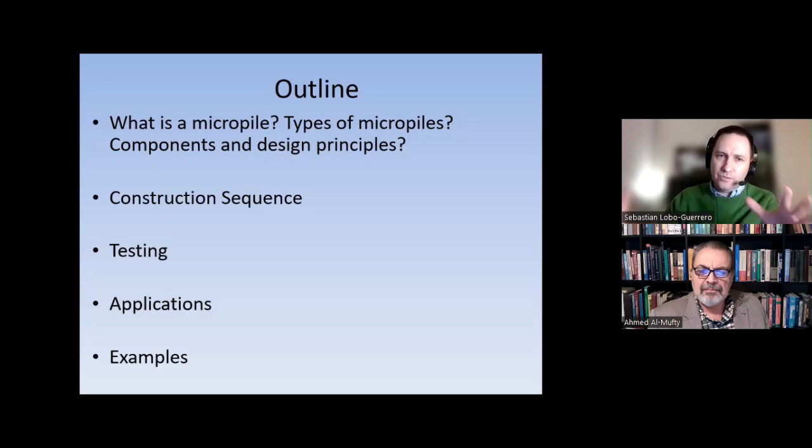Like to make vertical, or you can't make a micropile vertical. Correct, no. So initially he was doing them incline, because what he wanted to do was a reinforced mass. What he wanted to do was not individual elements. He wanted just to go and start drilling in all kinds of directions, injecting grout, and making like a rigid body out of that.

That's what I'm saying. Today that definition is more like if you're doing ground improvement rather than micropiles, because for us, micropiles now are foundation elements. Each individual is an element. So that was his initial definition, and he started using a smaller diameter compared to what at that time was being used for like a small pile, like a small shaft. That's where everything started as a micropile.

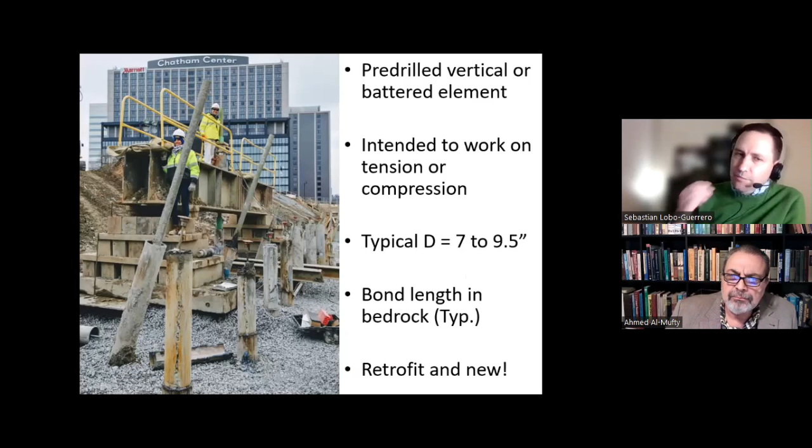Is this where the doctor... this one? This picture was in Pittsburgh. It was a bridge in Pittsburgh in the middle of downtown. Okay, yes, okay, thank you.

Yes, no problem. So moving into the design manual - this is basically what we have today. Really the main comprehensive manual is the Micropile Design and Construction manual, put together by FHWA. There are multiple editions of that, but it really started around the end of the 90s, and it became kind of like the main reference.

Then after that, AASHTO ended up incorporating micropiles. Typically the way it works is that FHWA, in the US, is the entity doing the research - they put together the conclusions and the document, but AASHTO is really what becomes a code, and it becomes law. If you're in transportation, you have to follow this. So AASHTO incorporated micropiles in section 10, which is foundations, and the equations we're going to talk about today are all on AASHTO.

Different states take AASHTO, different DOTs, and modify things depending on their state. For example, I have the design manual part 4 from the Pennsylvania Department of Transportation, which is the one we use in Pennsylvania. What they did is take AASHTO but modify it - for example, the part on rock, saying you can only have micropiles founded on rock and things like that. I have the honor of being co-author of the bridge design manual for the state of Delaware. In 2015 we put together this manual, and we also allowed micropiles and put in some special coastal considerations.

Which year, doctor? The original was 2015 for the one in Delaware. But since then, I know in 2016 we had a new version, and I think since then there's been one more update.

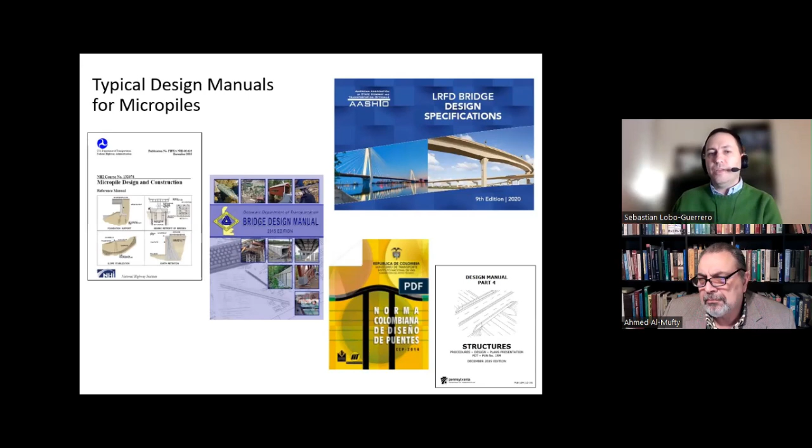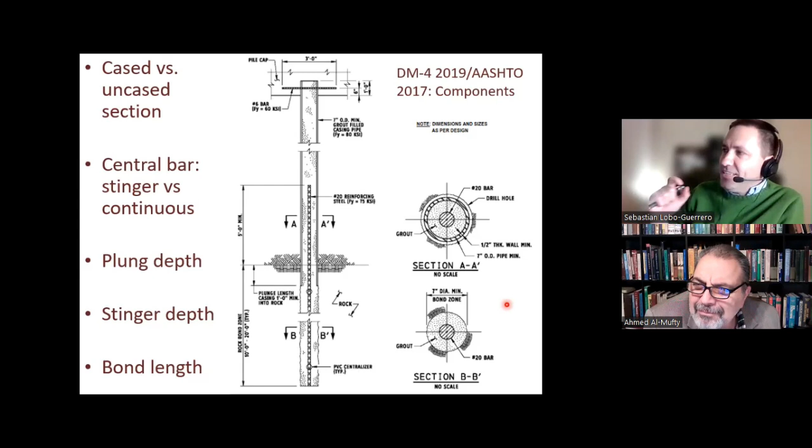Yes, bars. So it all goes into, because remember, there's a lot going into a name that is micropile. This started trying to, and this is interesting to see, the evolution of the technology, because when we started it was micro, small loads, small things. But then what is the cost? Look at it this way.

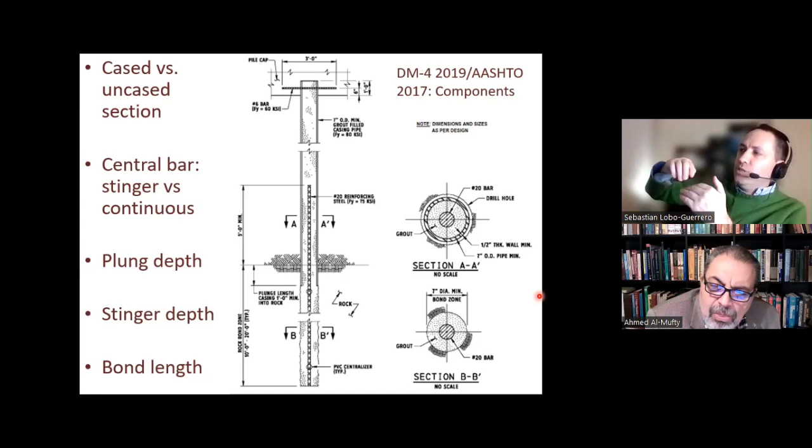When I'm drilling, imagine that I have 60 feet of soil and then I go to rock. If I'm drilling through 60 feet of soil and then 10 feet into rock, what I really want to do, instead of doing a lot of elements, is do fewer elements with more into rock and more capacity. The more capacity I can have in one element, the better, because then my cost is less. It costs me less to do deeper holes, but a significantly smaller number of holes, than to do a lot of holes that don't go deep. So because of those economics, you want to maximize the capacity of your micropile.

So when you are talking about these diameters, literally what we try to do is put a bigger bar that allows me a higher structural capacity. The higher structural capacity I can get, the longer my bond length without exceeding the 20 feet, and I'm optimizing the foundation.

So it is really more for economics and trying to make this cost effective than anything else. There is nothing wrong to put a smaller bar. It's just that if you put a smaller bar, your resistance is going to be less, your bond length is going to be less, and you're just going to need a higher number of elements. So that's really all the reasons. There is absolutely no problem doing something smaller. You can even reduce the size of the micropile itself, even if you reduce the bar. But it's just the economics, how they end up working out.

Now, the capacity, that's what I said, it has evolved. We used to do micropiles of 50 tons. Now we do micropiles of 250, the numbers have increased significantly.

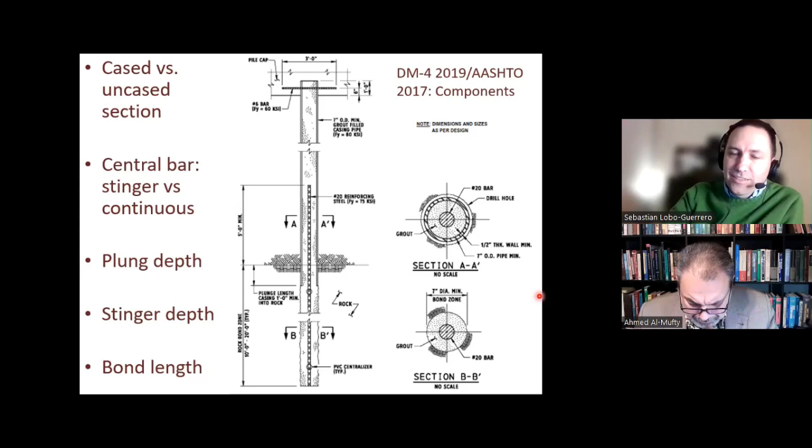So, is it in any way related to buckling of bars? That's another thing, and this just comes straight from FHWA. FHWA considers that if you have a micropile that is supported on soil, on the surroundings, like if I'm drilling through soil or if I'm drilling through bedrock, it doesn't really have any problem with buckling, as long as you stay with the typical diameters. We actually have to analyze it once, because when you pass through karst topography, or when you are passing through abandoned mines, and your micropile is going to have a length that is not supported by anything around it, then buckling is a consideration, because this is a very slender element. So in FHWA it's explained in detail.

We end up doing that calc for the typical micropile, about a 7-inch micropile with a number 20 bar. We found that you can easily have like 7 feet of unsupported length, and you are still not failing in like the Euler short column kind of buckling thing. So as long as you have support on soil or rock, buckling is not a main consideration.

But the moment that you start passing through voids, then you do have to be aware of buckling, and it's a potential failure mode. It will be very effective when you have a part of the pile above ground. Then that will be dangerous, really. Exactly, you need to check buckling that time. Correct, like you never see micropiles going like that, exactly for what you said, because then buckling -- they're usually underground, always supported by soil on the side.

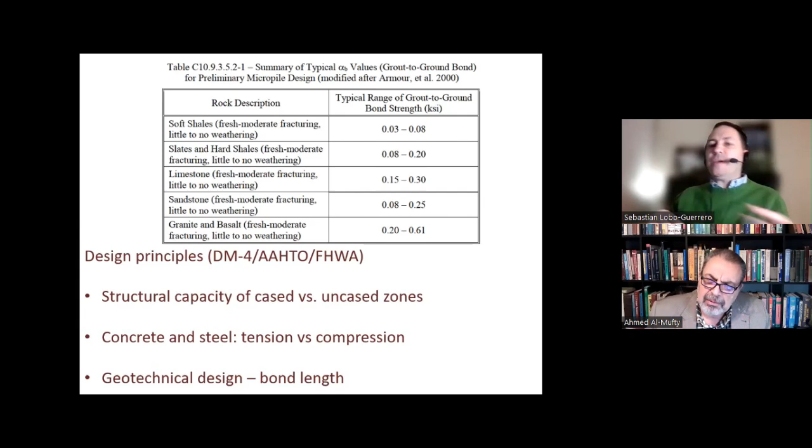Now, so that's in tension. What was that, you multiply 0.8 by what? So typically we used to do it: area times the yield times 0.8, just to reduce it. What is yield? The yield stress. Like, let's say 50 ksi, I mean in this case typically 75 ksi - the yield stress of the steel, basically.

The point that the resistance increases and then becomes plastic - the yield. Yes, correct. But yield - we will not use the ultimate? No, typically on this you use yield, not ultimate, just yield. Yes, that's an interesting concept. I mean, typically AASHTO requires yield and not ultimate.

And you multiply it by 0.8? By 0.8, correct. And then you multiply by a resistance factor? Yes, and that has changed in codes, because the tendency is that most codes are dropping that 0.8 and say, no, just give me the yield, multiply by the area, and that's my ultimate, and then I multiply by a resistance factor. But we used to have that 0.8 for many years. So that is when you are doing it in tension.

Now, when you are doing compression, then it's typically two separate calcs, because in compression you have the resistance on the cased portion and the resistance on the uncased portion. Why two calcs? Because on the cased portion, you do not have the central bar, so you only have the steel of the casing plus the concrete. While in the bond zone, you only have the central bar and grout - you don't have the casing, right?

So in reality it's very simple, because in the majority of cases the bar area is less than the casing area, so you can clearly see - you are required to do both, but you typically by inspection can eliminate one. And then that equation is the usual one: what is the area of the concrete multiplied by F prime C. For the concrete it's basically not the yield, because it's concrete, but basically the maximum stress that the concrete can take. So it's the area times F prime C.

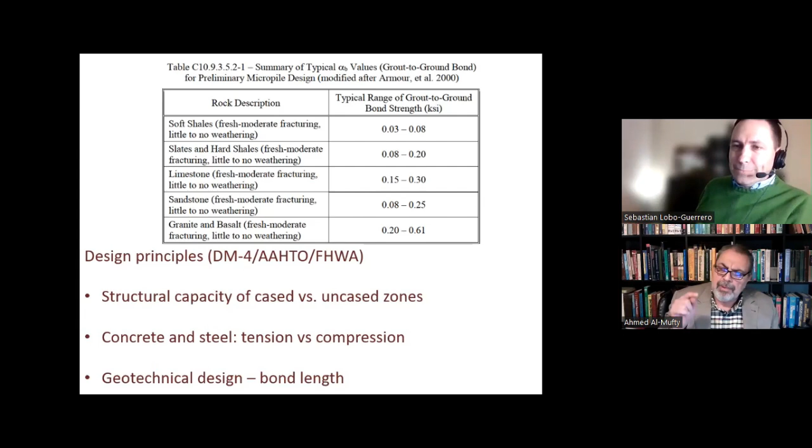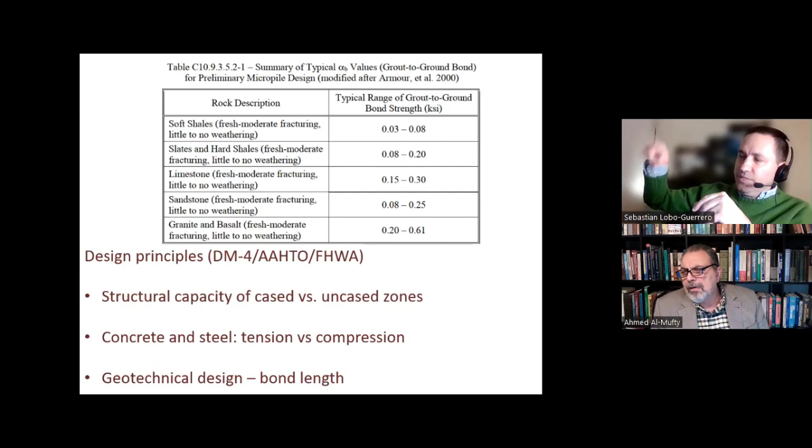Do you check any bearing stresses between concrete and the pipe? No, so that's okay. The general way to calculate is just the area of the concrete times F prime C times 0.85, similar to a column, plus the yield of the steel times the area of steel, and then all of that multiplied by 0.85. We're talking, this one is a structural design - it's the structural capacity of a column section. Correct, it's just the structural capacity of the section, yeah.

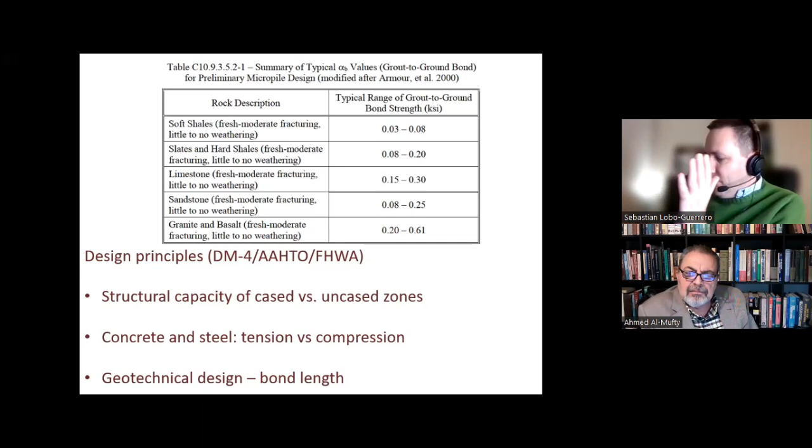But at the top, is the load really transferred to these three parts, or is it mainly transferred to the pipe? So, AASHTO - and I'll be careful on my statements - AASHTO assumes that it goes like that. AASHTO does not assume that there is any failure between casing and concrete. I agree with you, I think the more you instrument this, the load goes where it's more stiff, and probably goes more into the casing than you give credit for. But given the resistance factors and everything that we have, we don't really check the bearing stresses.

No, not really, the pipe and the concrete. Not really, I did it once because same as you, I was like, this doesn't make... I mean, I don't know. I wanted to see it.

AASHTO at the end has the bond between... what I'm saying is, when you check, you end up finding that bond between casing and grout is high enough that it justifies this assumption. I think it's just for your information. I did micropiles in my life, but not as a project, a full project of mine.

What I did usually, I go to micropiles when I have underpinning. Because the machines are small, I can push them inside the building. And I drill a couple of micropiles, replacing a failed pile or strengthening some area. That one I did, but generally, like a project like yours, this one I never did.

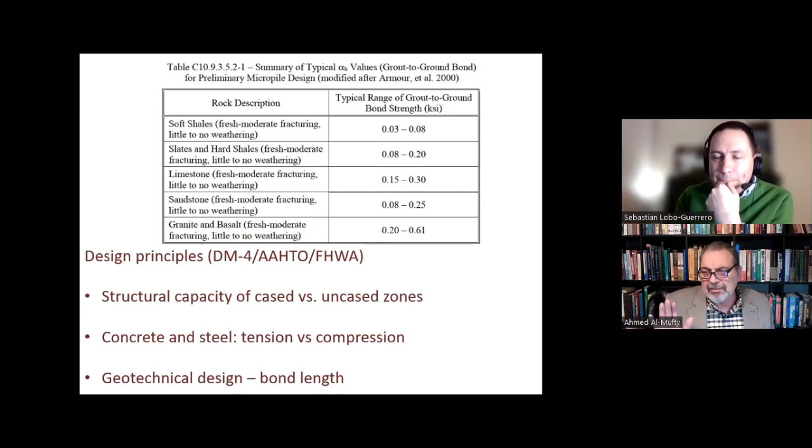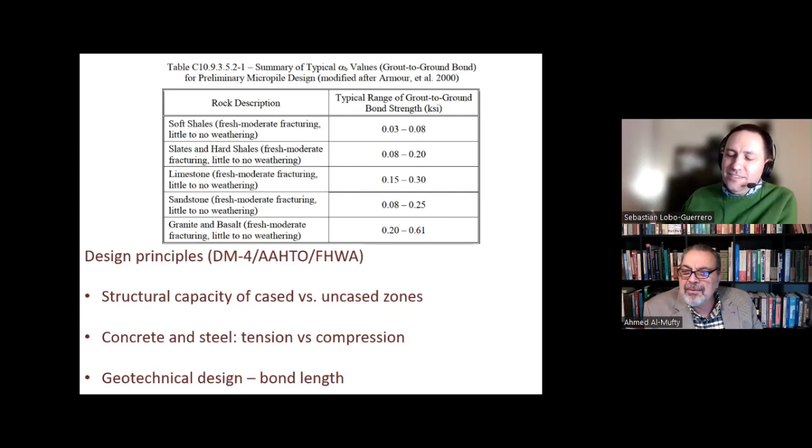So correct, and that's because of what you do and what I do. That's the way it started. This was done for underpinning, right? And then little by little, I used it for underpinning. And then the underpinning took over, right? I mean, they took off, and they became like brand new foundation elements, not only for retrofitting, but also for design. So yeah, this is really the part.

So it's very simple. I do have some thoughts on that, because after doing 20 years of micropiles, I was in some disagreement. And again, I want to be careful in this, because if you design them by code, when you are doing tension testing, the central bar is the one that takes everything, right?

But the more that I think, when you have the micropile going into the pile cap, and you typically put some kind of plate, you have your casing going, your bar, and then you put a plate and a nut, right? So when you pull the pile cap, it's going to develop a shear cone in the concrete, and that's going to come the resistance. To me, it's not that evident and obvious that the load is going to go all into that central bar.

So I start posing the question, how do you know that there is no load that goes into the casing? Now, if it goes into the casing, imagine that you don't have a central bar, imagine that you only have a stinger, and you pull the casing. There is going to be shear between the casing and the grout, and that shear is going to pass the load all the way to the central bar. Then there is the stinger on the bond zone, and there is going to be bond between that bar and grout, and that force is going to go back into the bond zone. It will transfer the load to the bond zone, yeah.

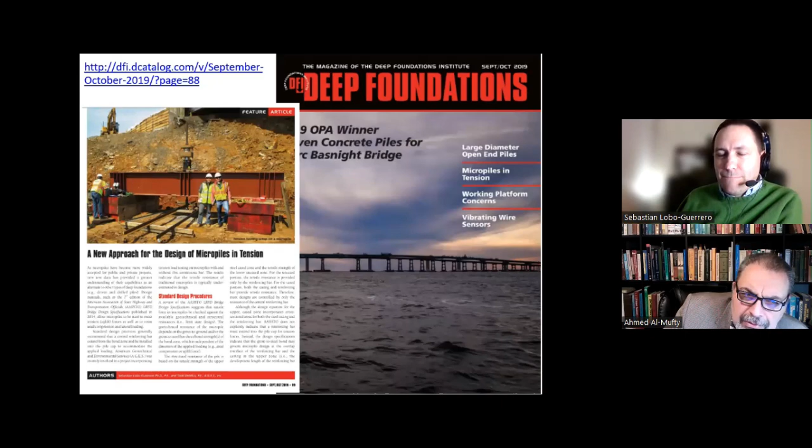Let me ask something about the test. You're using two beams here, with a gap between them to pull out the bar, the central bar. But it's not showing, so let me explain that to the audience. So you have the jack in the middle of two beams, and there's a gap in between?

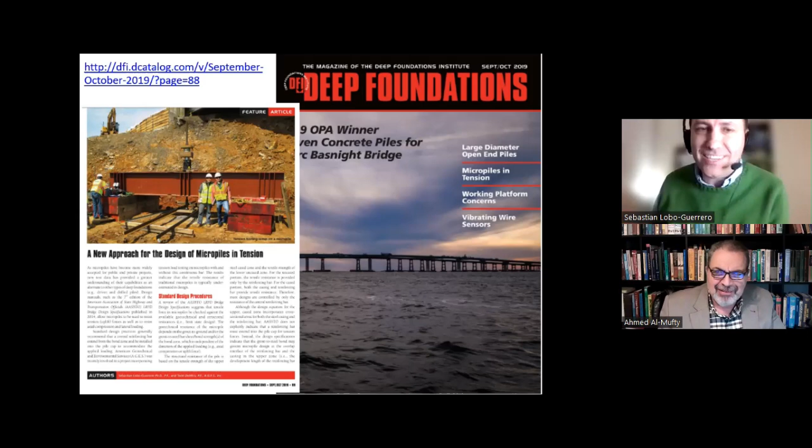Yes. So let's do this, hold the testing part, because I have a whole section of just testing. Let's go through this section, and then I'll go back, because I want to explain the whole setup of the beams and the whole thing.

So most of the rigs that you have now are track rigs. They are typically operated by remote control. There are smaller ones, the original ones were smaller, because they were going into basements, going under bridges. Now that we are drilling bigger and higher loads and all that, they have become bigger.

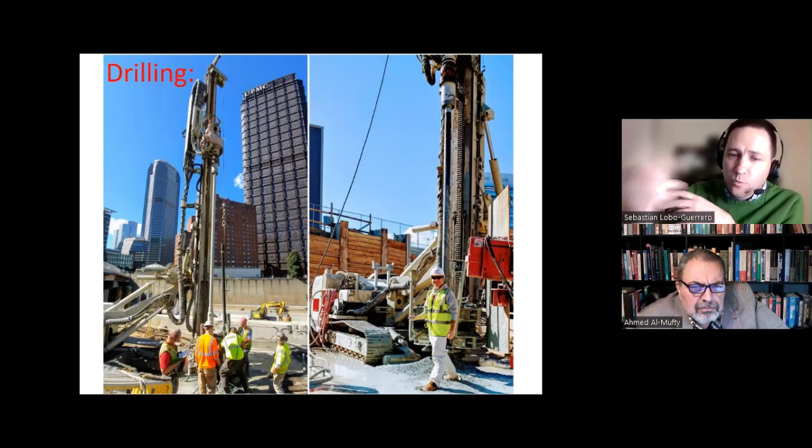So this is for a job, you can see this is the first micropile on the job. We're drilling, this is pneumatic compression air going down, and then you are drilling. Once you have the hole, this is another picture, you can see the pneumatic and all that. Sometimes you use water, sometimes you use air, depending. And you basically drill, you advance the casing.

This is the casing. These are details of the casing. The casing typically has little teeth because if you rotate it, it can also help.

What you see on the red square is this pneumatic jaw, this eccentric tool that, when it goes inside the casing and passes through it, goes to the other side and opens. It's an eccentric tool that opens and gives you a diameter that is bigger than the casing. So now you're making bigger holes that are more efficient.

And then on the left is the central bar. Basically, once everything is installed, that bar is gonna go in the middle. So this is basically the technology: you have the casing, you have the tool that opens and keeps going, and eventually you put the bar.

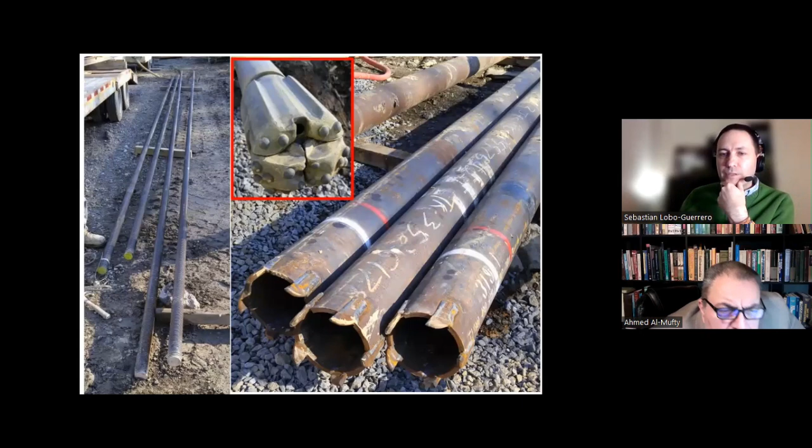Is that bar smooth or threaded? Typically it's threaded - it may be hard to see but it's a threaded one. Yes, typically we use thread bar, and it looks like 60 millimeters, really. Yeah, this one is probably smaller - that's an old picture, and I think at that time we were using smaller micropiles. You're gonna see a few pictures later on that is big, and also we typically...

How long usually are the casing pieces typically? Typically 10 feet, so they can come in 10 feet or 5 feet, depending on what you need. If you don't have a limitation, typically it's 10 feet. If you have limitations like overhead clearance, then you can go 5 feet.

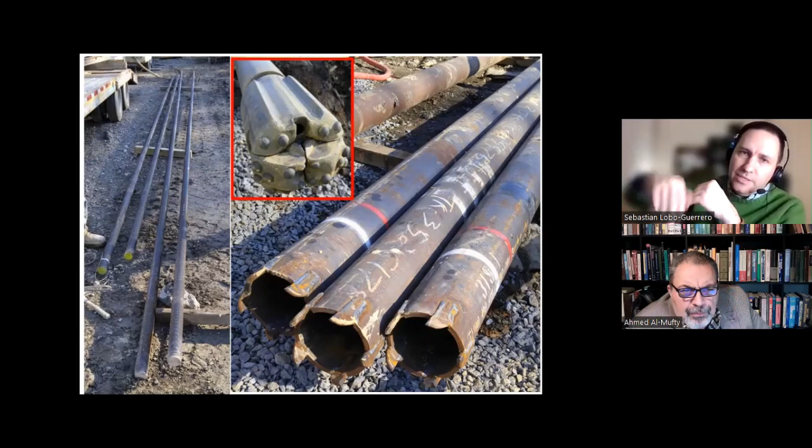So you drill, you put the permanent casing, you go inside. There are two ways to do it. Before we go to some point, we stop the casing and then we drill - but typically, most of the time, you advance the casing and the bit together. You go to your bond zone, and once you confirm that you have your bond zone, then you lift your casing.

Why I say that - because what you want to see is that your bond zone is not in an area that has voids or soil seams or anything like that. If you have a good rock like sandstone, that's fine, you're not going to expect many surprises. But this is done a lot in karst topography, when you have voids and soil seams, it's perfect because you pass through all that junk and go to a good strata.

So the way that you know if you're on good or bad material is basically the torque resistance, the penetration rate as the micropile is being drilled. The operator typically has a good eye on what is the rate of advancement, and if there's a sudden drop, that corresponds to some kind of void or soil seam.

So typically you go, and let's say my bond zone was 10 feet - once I determine that I have 10 feet of competent material, then I stop and lift the casing. That's going to be the final location of the casing. I retrieve the drill bit, I lower the bar - if it's continuous bar, then you lower it, and if it's just a compression, then you just put the stinger down. Once that is done, then you grout it.

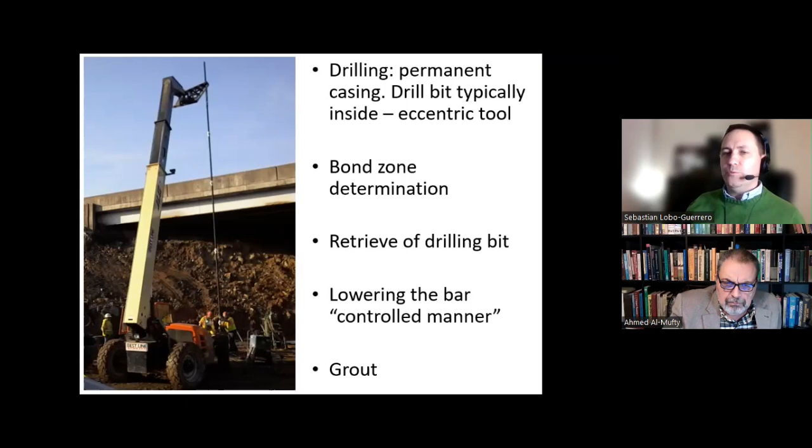Okay, so these are more examples of lowering the bar in a controlled manner. You can see a few things on the bar on the right side. You also have the centralizers, which are those white balloons or balls, whatever you want to call them. The only thing they do is that when you lower the bar, it just keeps it centered.

So when you put the grout and all that, it's just going to keep it centered so you have enough cover of grout around it. That's just the way you want to do it.

So now is the testing part. I'm going to talk a little bit about the testing that we do, and then we go into the apparatus and all that. So there are different kinds of testing, two main ones.

The first one is verification testing. This is similar to other deep foundations. Verification testing is typically 1 or 2 per substructure. If you're talking bridge design, it's going to be 1 or 2 per local substructure, per local condition. They tend to be sacrificial - you typically don't count them as the production ones.

They are done at the beginning, and your idea is to take it to about 2 times the unfactored load. So I take my load, I take any load factor from LRFD, I just take an unfactored load, and I want to test it to 2 times that, because I want to have a sense of confidence and reliability on this system, that I can go to a really high load, way higher than I designed, and it's still going to be fine. Again, that is on a very limited number of piles, typically sacrificial.

Then you do proof testing. Proof testing is different than verification because this is actually on production micropiles. You typically only do about 5% of the production micropiles. This has changed a lot. Initially, that 5% is what FHWA was recommending.

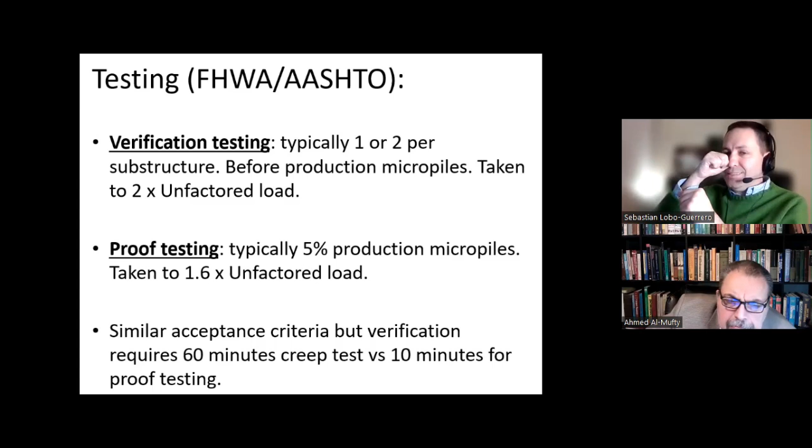But traditionally, the proof testing was only done on 5%, and it was taken to 1.6 times the unfactored load. You did not want to take it as high as the verification, but you wanted to go at least to the factored load. So if you assume that all the factored loads combine to about 1.5, then you are testing it pretty much to your factored load or very slightly above that.

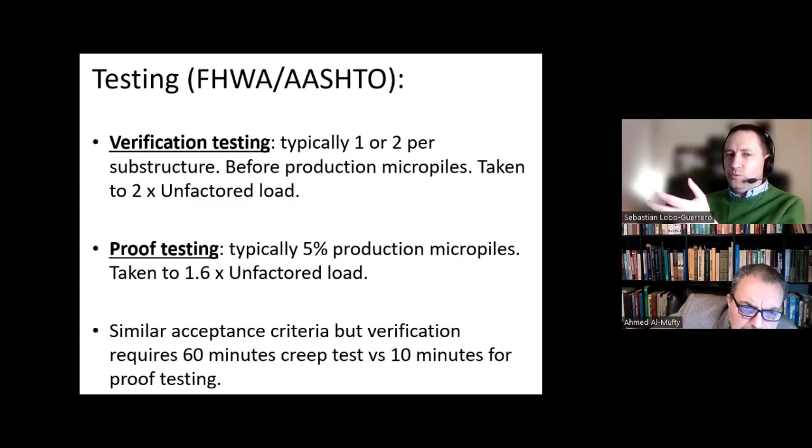So that is, in summary, the two tests that you can do. They are done with the same frame, with the same equipment. It's just a definition of the load that you put on it.

Now, you not only go and put the load and go to the maximum load, but you also want to hold the load and do a creep test. The creep test, depending if it's a proof or a verification, can vary in time. Typically for verification testing, you leave the load for 60 minutes and analyze the deformation over that time. If you're doing a proof test, you do a reduced version - only 10 minutes. And that's going to enter into the acceptance criteria. But that's pretty much just the way you do it.

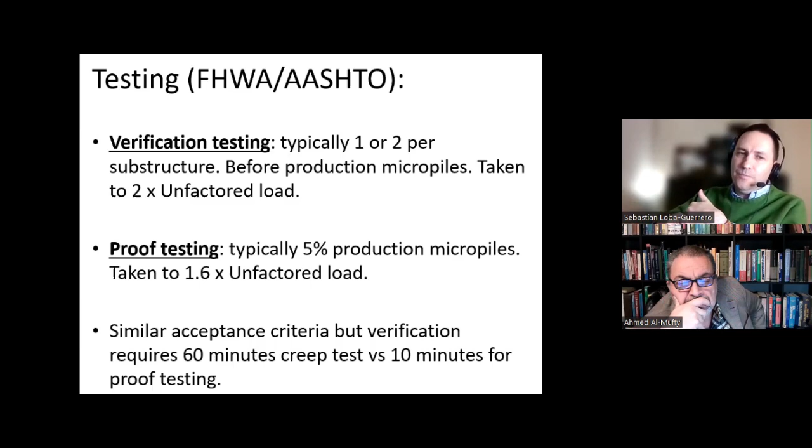So now let's talk about the equipment, and then we can talk about the acceptance criteria. Because this is not straightforward, and I'll tell you a lesson that I learned with a high price.

The typical setup of a micropile all depends on whether it's tension or compression, and it's extremely important. When I started my career, I did not understand why it mattered so much if it was tension or compression. I was thinking, if my micropile is designed in compression, I want to test it in compression. If it was designed in tension, I'll test it in tension. Now I'm going to explain why - one test, it's a small difference, compression and tension.

It doesn't sound like much, right? One test probably costs 5 times the price of the other. And it's all because of the constructability. This is extremely important to understand, regardless of the design point of view.

So the way the test is done is you have the pile coming up. Even if it's compression or tension, you need to have a central bar so you can grab to the jack. So you have your bar coming from the micropile going all the way up. And as mentioned before, you have 2 beams - one beam at the front, one beam at the back.

Your micropile is going through those, and then it passes, and you put a plate, and then you put the jack on the top part. This itself is a tension micropile because the jack is right here, right? You have the jack here, so you have one beam, one behind. The micropile bar is passing through, and then you put your jack, and then you put this plate.

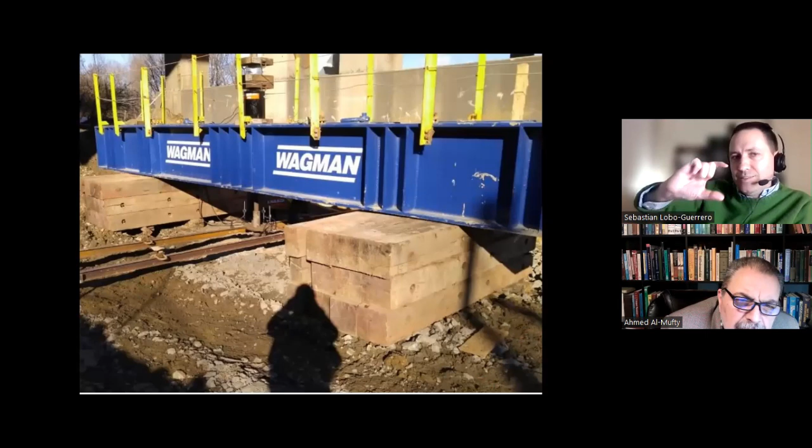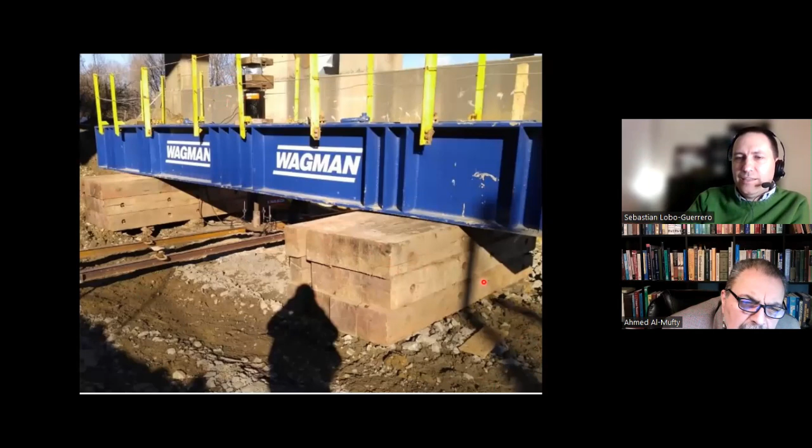This is another example. Clearly you can see that it's a tension pile because the jack is on the upper part, right above the beam. Every time you see the beam and the jack being above, there is no difference with the one before. This setup is a lower pile, but similar results - you can see similar dial gauges, and it's a similar setup.

So let's move into the acceptance criteria. As we were discussing before, the way you test micropiles typically comes from the ASTM standard, the traditional D1143 for compression, and there's another one for tension whose number slips my mind. The criteria comes from a combination of things. On my projects it's always in the DOT specs - the project specification should refer to which code or manual controls. I believe they are included in the FHWA manual, but the different DOTs take them and modify them, and different agencies fine tune it.

But the main thing is that you are looking at three main aspects. Regardless of where you're working, these three acceptance criteria will show up in one way or another, slightly different. The first one is called plastic elongation. Because, as we were talking before, you do not want your micropile's bond zone to pass from peak to residual - you want to always be on peak. So typically the first criteria has to do with the plastic elongation - you don't want to see failure in the bond, because if you saw failure past the peak, that's exactly it.

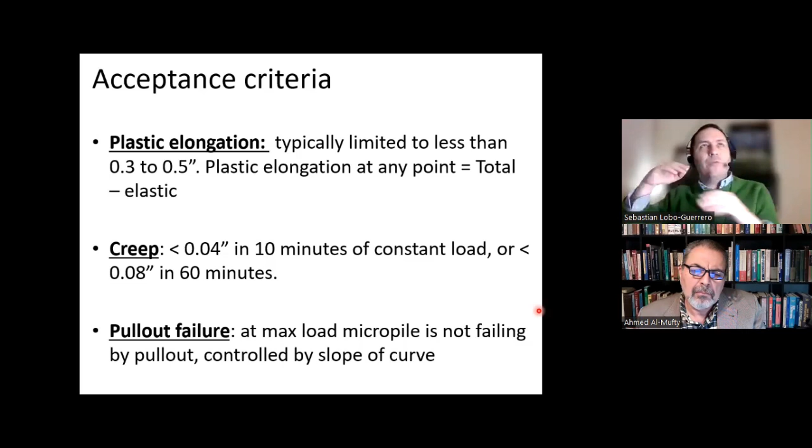And it's just trying to make sure that if I keep the load constant, I'm not just going to have a relaxation of the material and some kind of creep. And then the third criteria is just the pull-out failure, which is looking at the last 2 points of my loading curve, and I want to make sure that I'm still moving in a linear trend. I don't want to see on my last two that it went linear and then becomes completely flat, because that means I went to yield or passed peak and it's going to fail. So one way or another, the project specification will define these 3 criteria.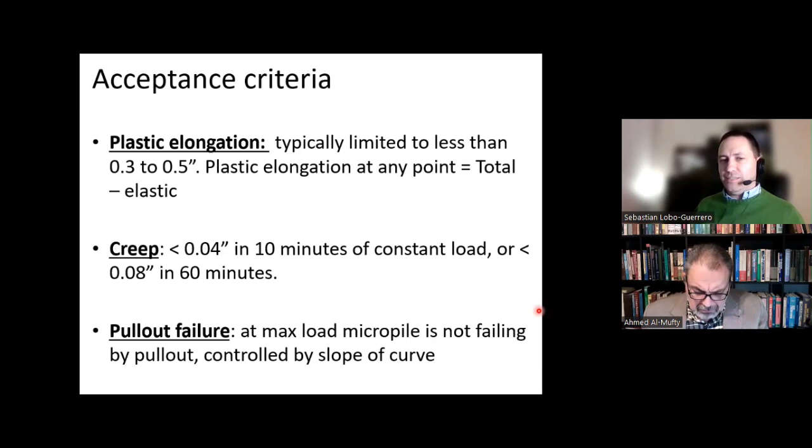And the way it's typically done is that you satisfy the criteria and then you accept the pile. And then once you accept the pile, you go to the next step, which is the connection. So let's talk a little bit about the connection.

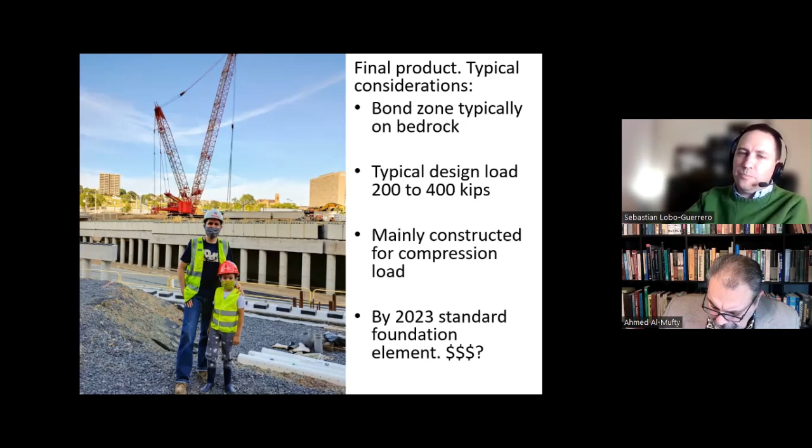In this particular project, the reason we used micropiles is because this is in the middle of a city. We could not drive piles. It was also very tight construction. We cannot have noise, there were utilities and everything around. You cannot vibrate, you cannot produce any noise or anything like that. And there were also obstructions. You needed to pass through existing footings from a previous structure, literally needed to pass through a footing. So with a driven pile, you cannot do that. So because of all the pre-drilling necessary and all that, micropile was the way to go.

In the main applications, you can have vertical and lateral loads. We talked about that at the beginning, right? It's just the projection of the axial force. Very useful technology when you are doing pre-drilling and driven piles are needed.

I always like to take my selfies and put them on LinkedIn and all that. Take your pictures after the test, right? Once this is tested, while testing you stay away. Exactly, while testing you stay away. Once the test passes, then unload the pile, go there, pose, do whatever you want to do.

It's very proven. And I can never really finish talking about micropiles without talking about this bridge. This is a bridge where we did the forensic investigation in Colombia, South America. We were not involved in the design. We were not involved in the construction. Unfortunately, I was just involved in the forensic investigation.

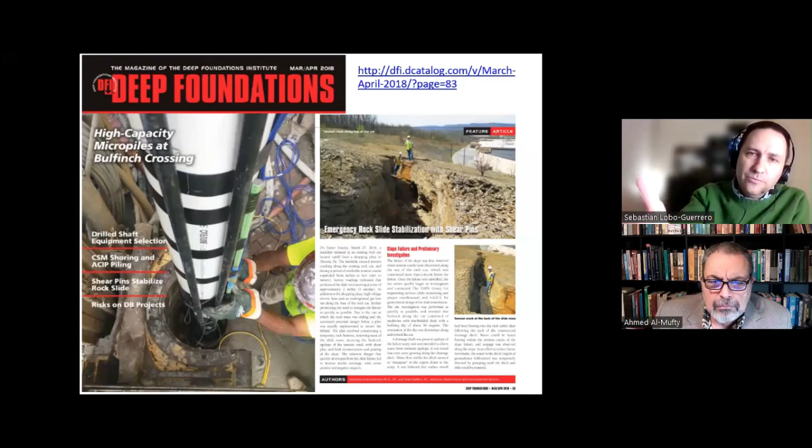So I don't want to spend too much time there, but if you want to learn more step by step, you can watch our YouTube video and then also see the paper. And then in conclusions...

It's a really good technology. It depends a lot on subsurface investigation - you have to do a subsurface investigation, know what is there. As we said, it should not be your first option. But if you do a subsurface investigation and find problems like karst, obstructions, stuff like that, that's going to make any other kind of deep foundation very complicated - the pre-drilling aspect of your micropile is going to help a lot. You need geotechnical engineer involvement in preliminary design, but also during construction.

It's one of those techniques where, because the installation is so sensitive, you want to avoid any kind of excessive grout takes. You need to have a geotech engineer involved. It cannot be something a geotech engineer designs and then disappears - it has to be all integrated into the same team.

Identify risk and contingencies. One of the main things with micropiles is the grout take. When I started my career, an excessive grout take was more than 25% of the theoretical volume of the micropile - so you calculate the volume, and if your grout volume installed is more than 125%, that was considered excess grout take, and the contractor was paid by cubic yard on that. That number was then refined to 150%, and today it's considered to be 200%. So basically I need twice the theoretical volume for the owner to pay extra to the contractor for that. That's definitely the biggest risk here.

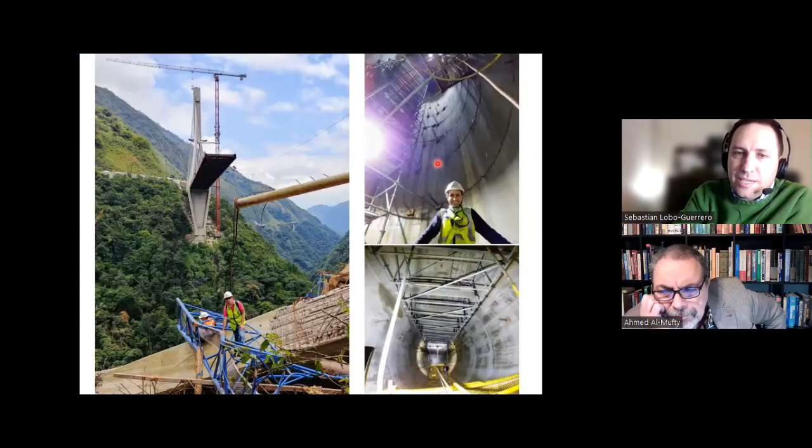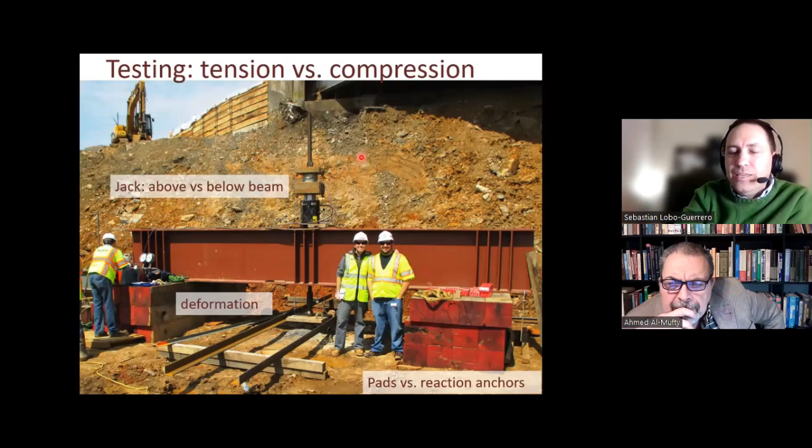Most of the examples I believe that I was showing, like this one, you see it's also epoxy coated. But some of the other ones, like this, they are not. Well, usually the grout is good prevention. Yes, I mean that's really my point. And the thing to me is, if you're going to have this, and it's going to have a casing and concrete between the casing and the bar, that is a lot of corrosion protection.

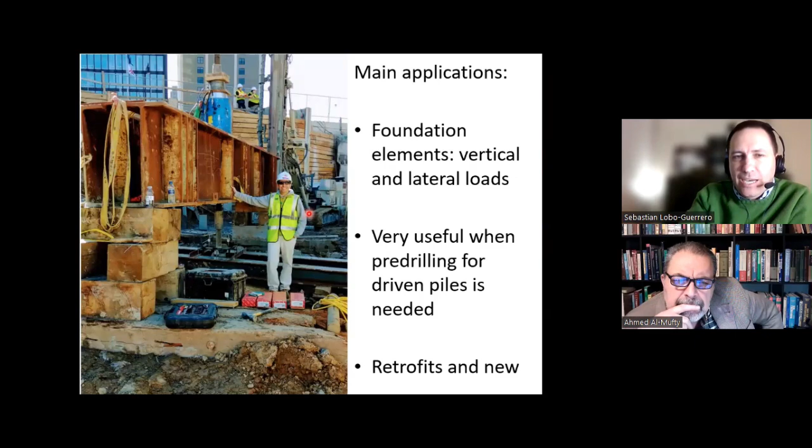You know what I'm saying? I mean casing plus grout, that gives you a lot. So if you have a very corrosive environment, then you put the epoxy. I don't want to sound like I'm doubting the manuals, but I wonder how much is really necessary, because I believe at that point you already have enough corrosion protection.

But I guess it's better to be conservative. So that's typically the way it is. Well, usually if you have a deep environment, the corrosion will not be as effective. But because micropiles are usually close to the surface, they are subject to groundwater fluctuation, so they may have a problem with existence of a lot of oxygen.

Yeah, correct, and that can - we've usually seen projects where we add even cathodic protection to the reinforcement, to the micropile reinforcement. You can add cathodic protection. Yes, absolutely, you could always do it. It's all cost and benefit. Correct, it's a ratio - you should decide what to do for corrosion based on your specific situation.

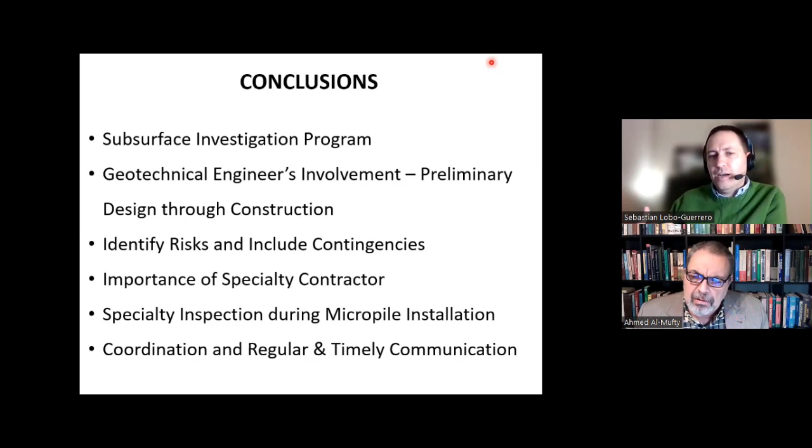So I think that's really it. I mean, we talked about the last one - obviously you need to have a specialty inspection, you need to check all these parts of the process. And in reality, everything is about coordination and regular timely communication. If you know you can have excess grout and things like that, just communicate a lot between construction and design, and start coming up with strategies on how to minimize it.

So this part of the presentation is just some papers, but I think we talked about all these on the previous ones. We talk about drilled shafts, we talk about stabilization, and obviously we have our previous recordings on YouTube and all these topics.

I love doing these videos, and I love having these conversations with different people talking about topics. I honestly believe YouTube is a great resource to learn more about geotech. YouTube is not just for videos of cats, it has a lot of educational content. I play chess, and I learn a lot of chess just by watching YouTube videos.

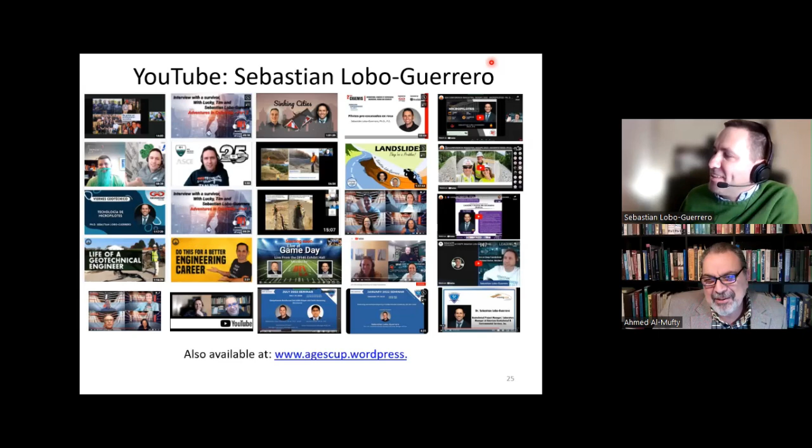You need to promote that. You play chess too? Yeah, alright, we'll play. Next time we are in Toronto or somewhere we can meet, we'll play. We can play online, but we should record the game so you will not run away from the result. You're intimidating me right there. I always say I love the game more than the game loves me.

I grew up being presented to the industry when I was young. My grandfather was a civil engineer, my dad is a civil engineer. So growing up, I always looked at our profession as very respected and prestigious, and I always like to transmit that - even if he doesn't end up being an engineer, that he understands the passion I have for what I do and how much love we have for what we do, and then he can apply that to whatever he wants in life. I do believe that what we do makes a big difference in our world and society, and it's a beautiful profession. Geotechnical engineering, as part of civil engineering, is not new - we were talking about Terzaghi before the recording - but I believe it's exciting and a recent field, and we need to bring more people into it. I'm always happy to be an ambassador for our profession and try to recruit more and more.